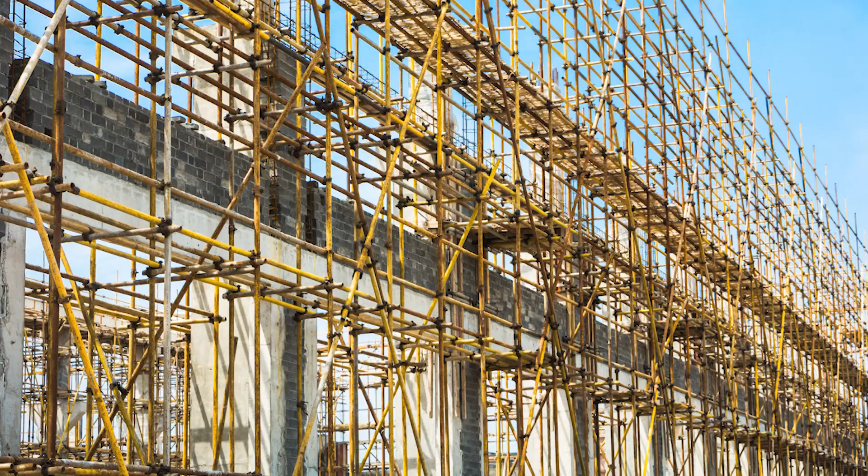Learners, I am Professor Munish Kumar Bharadwaj, and today I'll discuss with you risk assessment for scaffolding.

The content of today's discussion is: first I'll discuss with you the importance of risk assessment, then terminology related to risk assessment, then the process of risk assessment, and finally hazard identification.

The learning outcomes of this lecture are that after going through this lecture, you should be able to express the importance of risk assessment. Also, you should be able to define various terms related to risk assessment. Then you should be able to explain the process of risk assessment. And finally, you should also be able to explain the hazard identification process. Now let us begin the topic.

So, as far as risk assessment in scaffolding is concerned, risk assessment in scaffolding works is a crucial process that helps ensure the safety of workers and the successful completion of a construction project. Scaffolding is a common feature on construction sites and presents various risks including falls, structural failure, and environmental factors. Today, I shall discuss the important aspects related to risk assessment for scaffolding works.

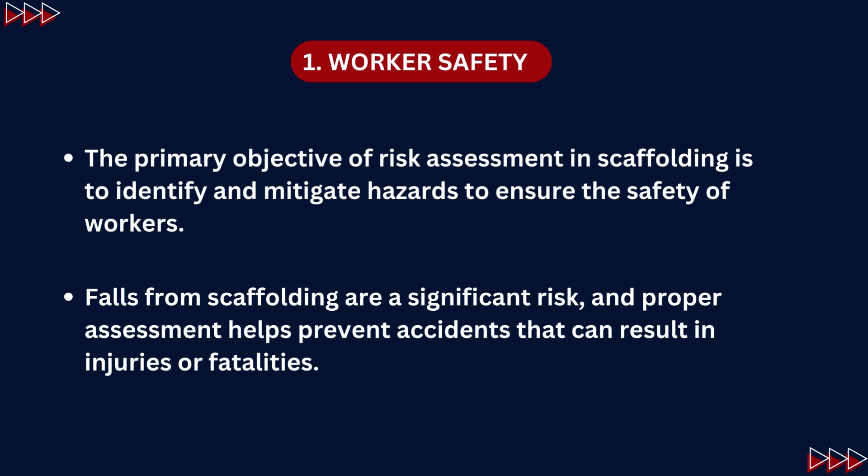So the first thing is worker safety. The primary objective of risk assessment in scaffolding is to identify and mitigate hazards to ensure the safety of workers. Falls from scaffolding are a significant risk, and proper assessment helps prevent accidents that can result in injuries or fatalities.

Then the second point is legal and regulatory compliance. Regulatory bodies and government agencies establish strict safety standards and regulations for scaffolding. Compliance with these regulations is mandatory, and risk assessment helps construction companies meet these legal requirements. So that is the importance of risk assessment.

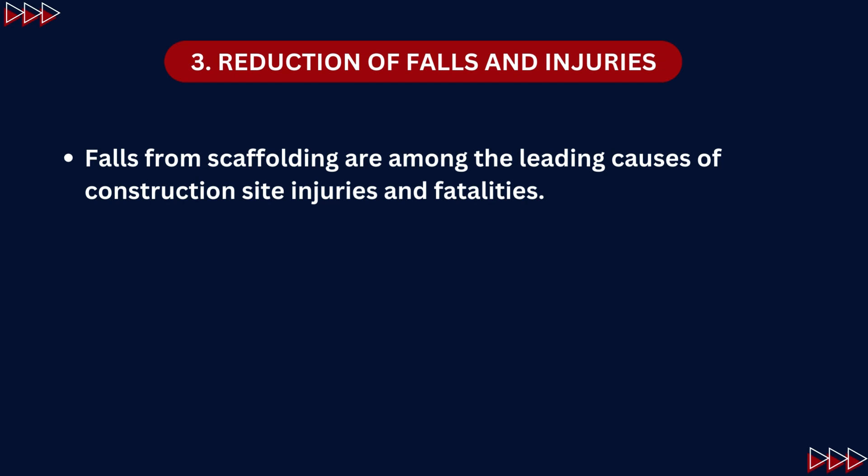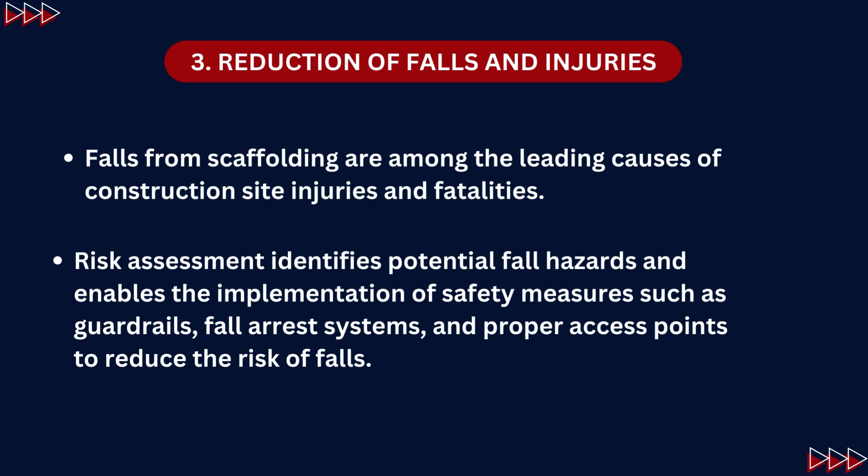Then the next point is reduction of falls and injuries. Falls from scaffolding are among the leading causes of construction site injuries and fatalities. Risk assessment identifies potential fall hazards and enables the implementation of safety measures such as guardrails, fall arrest systems, and proper access points to reduce the risk of falls.

Then the next point is minimizing liability. By conducting risk assessments and implementing safety measures, construction companies can reduce their liability in case of accidents. This can help protect the company from legal actions, fines, and financial losses.

The next is resource allocation. Risk assessments help allocate resources efficiently, because resources are precious. By identifying high risk areas and focusing resources on these areas, construction companies can optimize safety measures, training, and equipment use.

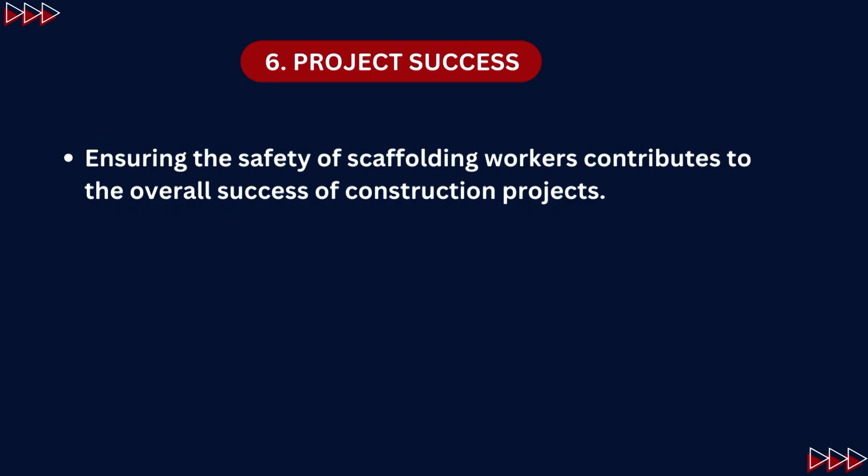The next important point is project success, meaning the success of the project. Ensuring the safety of scaffolding workers contributes to the overall success of the construction project, because when there is no fear, workers can work with more concentration, with more speed. Unforeseen accidents can cause project delays and cost overruns, both of which can be mitigated through effective risk assessment.

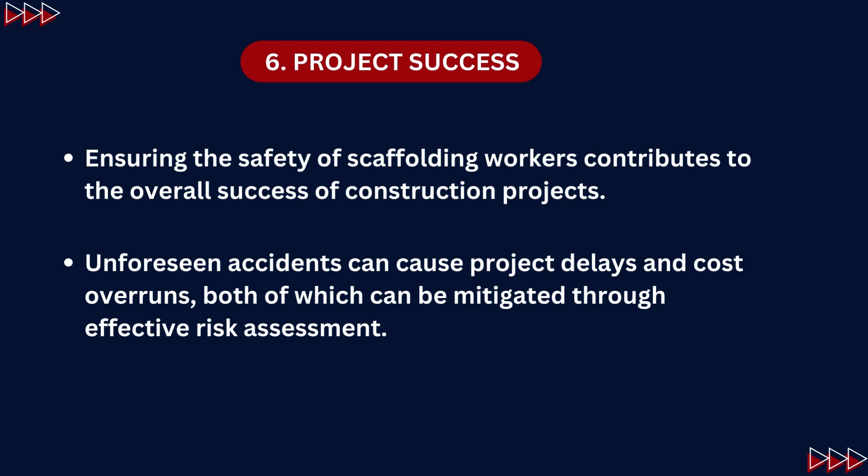The next point is improved productivity. Workers who feel safe and secure on scaffolding are more likely to be productive and efficient. Reducing the risk of accidents leads to a better work environment and improved morale.

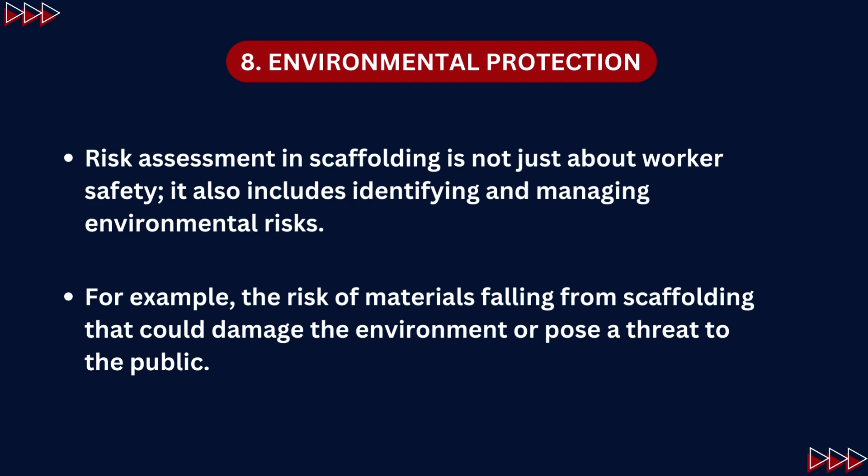Then the next point is environmental protection. Risk assessment in scaffolding is not just about workers' safety, it also includes identifying and managing environmental risks. For example, the risks of materials falling from scaffolding that could damage the environment or pose a threat to the public.

The next important point is reputation and brand image. Demonstrating a commitment to worker safety and responsible scaffolding practices can enhance a construction company's reputation and brand image. Clients, stakeholders, and the public are more likely to trust and support companies with strong safety records.

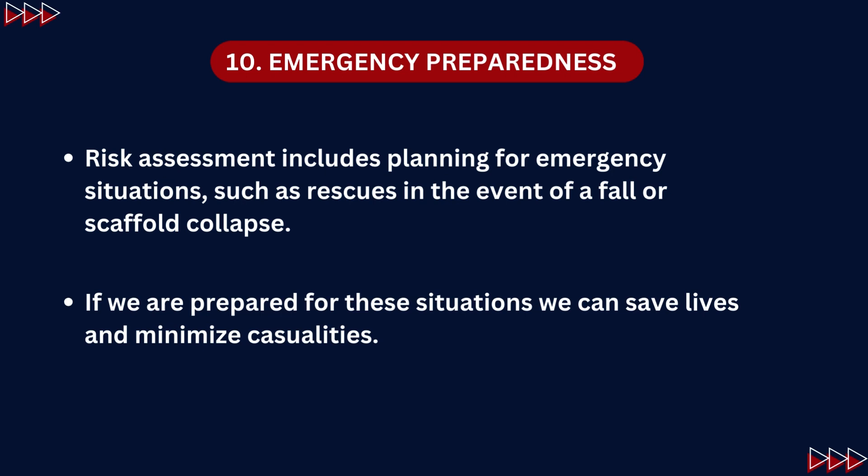Then the next point is emergency preparedness. Risk assessment includes planning for emergency situations such as rescue in the event of a fall or scaffold collapse. If we are prepared for these situations, we can save lives and minimize casualties.

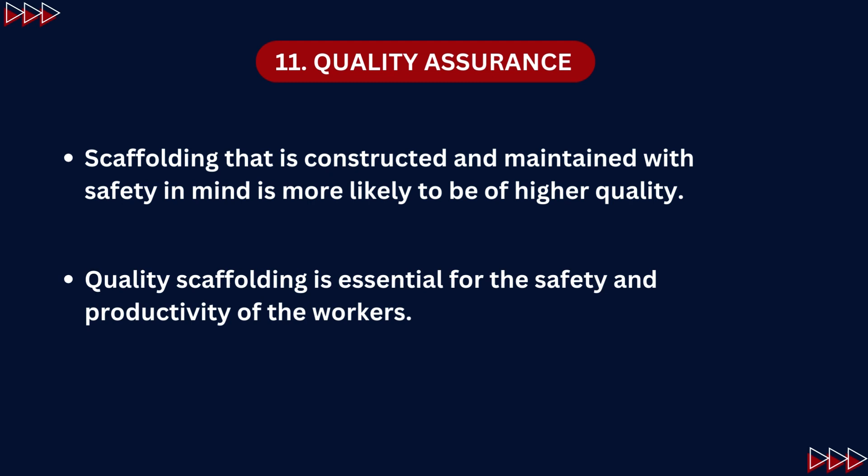The next point is quality assurance. Scaffolding that is constructed and maintained with safety in mind is more likely to be of higher quality. Quality scaffolding is essential for the safety and productivity of the workers.

So this way, we see that risk assessment in scaffolding is essential for safeguarding workers, ensuring legal compliance, minimizing accidents, and maintaining the overall success and reputation of construction projects. It is a proactive and systematic approach that contributes to a safer and more productive work environment.

Now, let us see some terminology related to risk assessment. The first important term here is hazard. What is a hazard? A hazard is defined as any condition, substance, or activity that has the potential to cause harm or injury to people, damage to property, or have a negative impact on the environment. So here we are covering three things: impact on people, property, and environment.

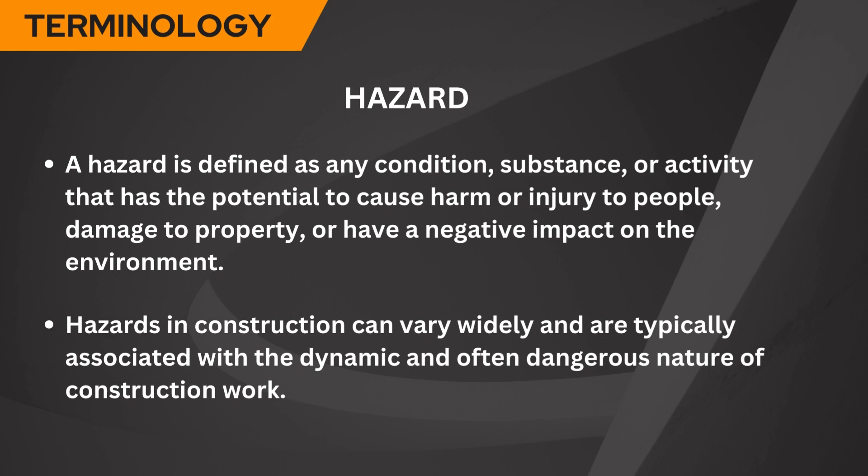Hazards in construction can vary widely and are typically associated with the dynamic and often dangerous nature of construction work. Let us see some examples of hazards in the construction industry. The first hazard in the construction industry is falls from heights. This includes falls from ladders, scaffolds, roofs, or elevated work platforms.

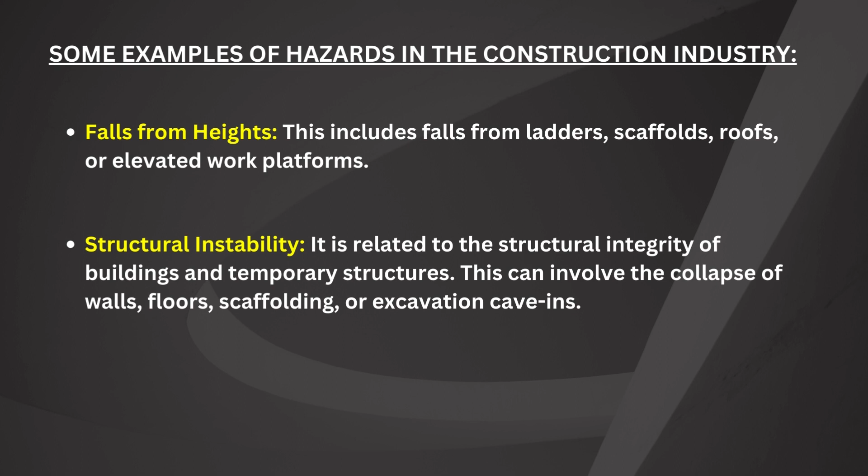Then next is structural instability. It is related to the structural integrity of buildings and temporary structures. This can involve collapse of walls, floors, scaffolding, or excavation cave-ins. The next hazard is electrical hazards: exposure to live electrical wires, poorly maintained electrical equipment, or unsafe wiring.

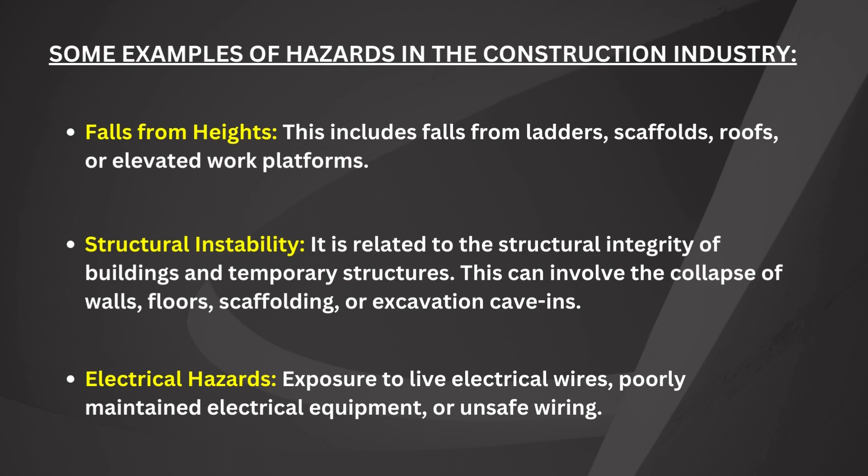Then another hazard is fire hazards. Construction sites often involve welding, cutting, and the use of flammable materials, and these all increase the risk of fire.

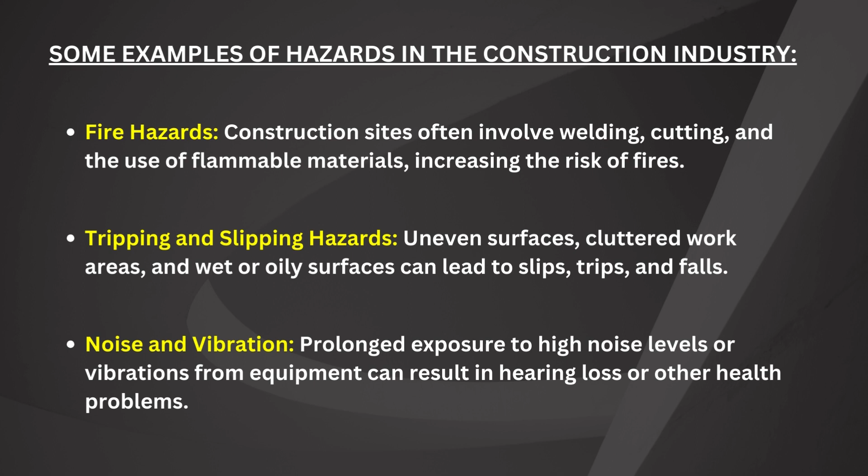The next hazard is tripping and slipping hazards. Uneven surfaces, cluttered work areas, and wet or oily surfaces can lead to slips, trips, and falls. Another hazard in the construction industry is noise and vibration. Prolonged exposure to high noise levels or vibrations from equipment can result in hearing loss or other health problems.

Now, let us move to another term, risk. What is risk? Risk is defined as the likelihood and potential consequences of events or situations that could result in harm, injury, damage, financial loss, or project delays. Risks in construction projects can vary widely and should be identified, assessed, and managed to ensure the safety of personnel and the successful completion of the project.

Now let us see some examples of risks in the construction industry. The first example is safety risk. In safety risk, first we cover fall risks: the risk of workers falling from heights such as scaffolding, ladders, or roofs. Another risk is structural risk: the potential for building structures to collapse or fail during construction.

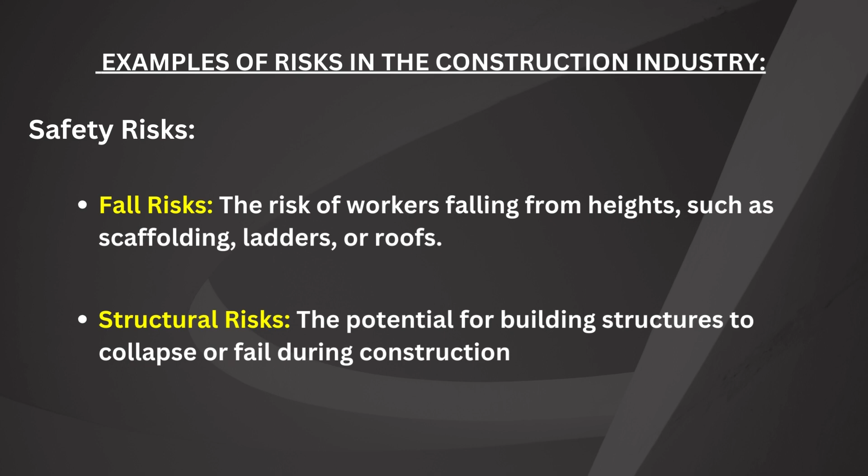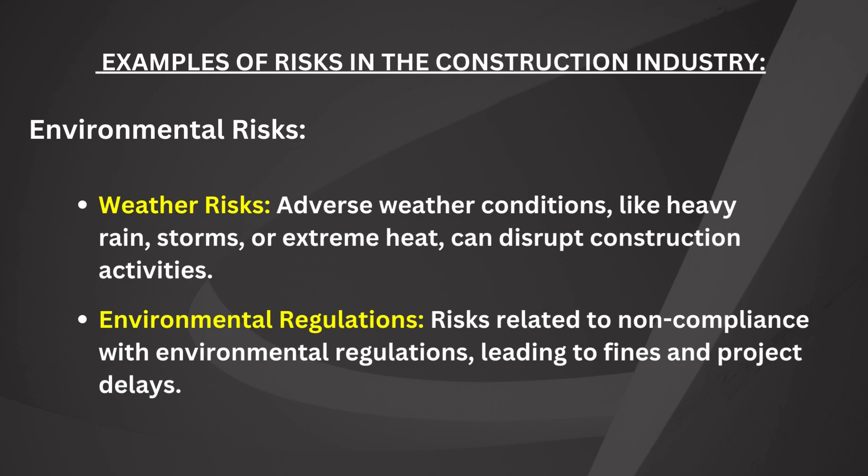Another type of risk is environmental risk. This again covers different types of risks. One is weather risk. Adverse weather conditions like heavy rain, storms, or extreme heat can disrupt construction activities. Another one is related to environmental regulations: risks related to non-compliance with environmental regulations leading to fines and project delays. Here, workers are not affected, but the project is affected when the company is fined, and ultimately it may cause project delay.

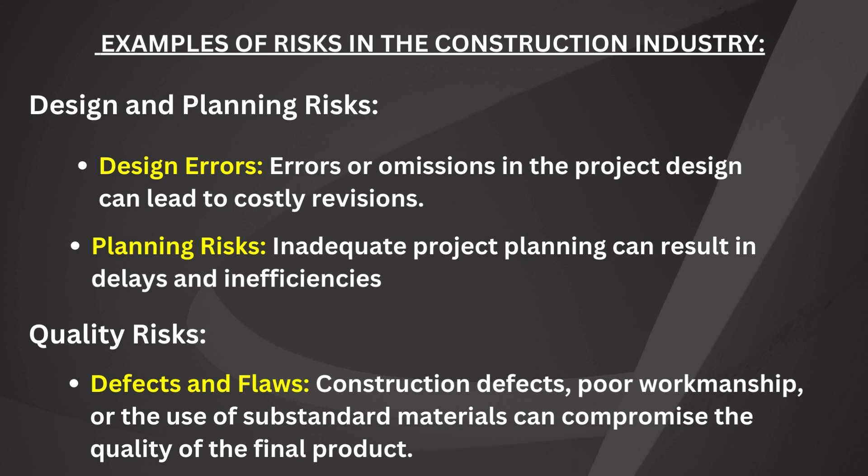Then another risk is design and planning risk. First is design errors. Errors or omissions in the project design can lead to costly revisions. Then planning risks. Inadequate project planning can result in delays and inefficiencies. Then another type of risk is quality risk. In this type of risk, we cover defects and flaws. Construction defects, poor workmanship, or the use of substandard materials can compromise the quality of the final product.

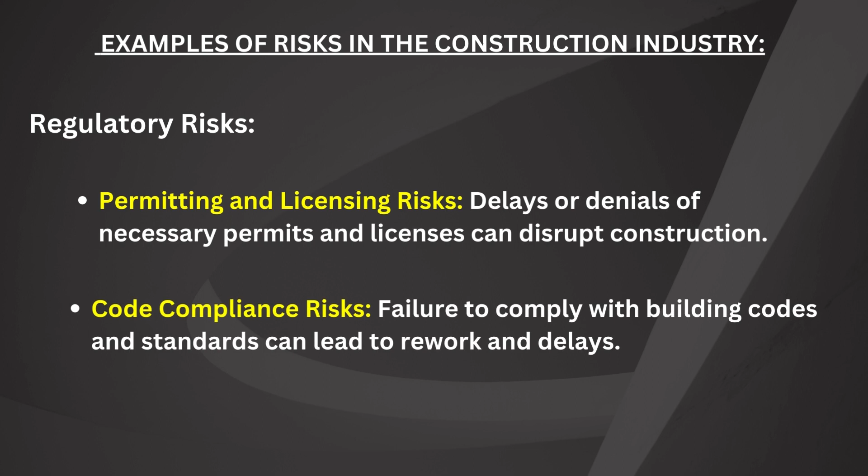Then regulatory risk. First is permitting and licensing risk. Delays or denials of necessary permits and licenses can disrupt construction. Another one is code compliance risk. Failure to comply with building codes and standards can lead to rework and delays. So these are different types of risks.

Now let us talk about the process of hazard identification and risk assessment. This process involves four steps. The first step is hazard identification. In this step, various hazards that could impact the project as well as the health and safety of the workers are identified and separated from those that cannot. Some may affect the workers' health as well as the project, and some may not, so we have to identify and separate these hazards. This requires a review of all hazards and their causes to determine whether they may be a threat to the project and the health and safety of the workers.

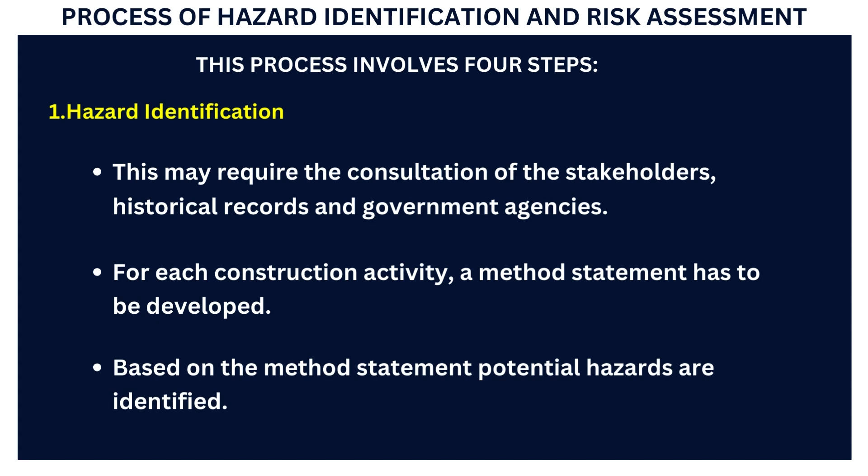This may require consultation of stakeholders, historical records, and government agencies. For each construction activity, a method statement has to be developed, and based on it, potential hazards are identified. Number two is risk assessment. After having identified the hazards, we calculate the risk per hazard. In this step, the level of risk for each hazard is examined. This may involve speaking with hazard experts, researching past occurrences and possible scenarios. The likelihood of the hazard occurring and its potential impact on people, property, the environment, business and finance, and critical infrastructure should be examined.

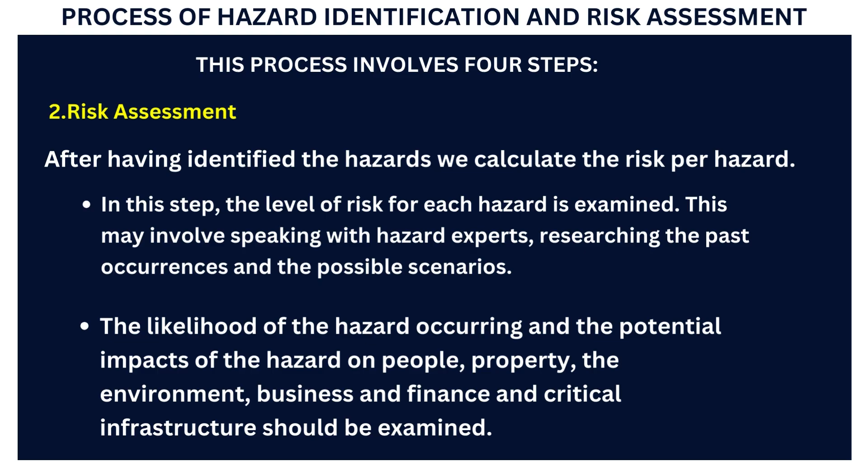The next step is risk analysis. The information collected in the risk assessment step will be analyzed in this step. The desired outcome of the risk analysis is the ranking of the hazards. This highlights the hazards that should be considered a current priority for your emergency management program. The next step is monitor and review. It is important to remember that hazard identification and risk assessment is an ongoing process, not a one-time activity. Hazards and their associated risks must be monitored and reviewed from time to time.

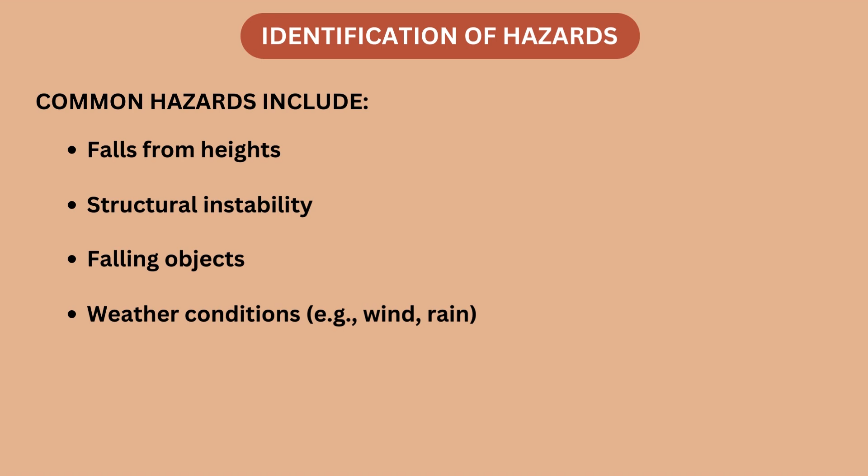Now, identification of hazards. How do we identify the hazards? Start by identifying all potential hazards related to scaffolding. Common hazards include falls from heights, structural instability, falling objects, weather conditions such as wind and rain, electrical hazards, and inadequate access or egress, meaning how the workers will access the scaffolding and move up.

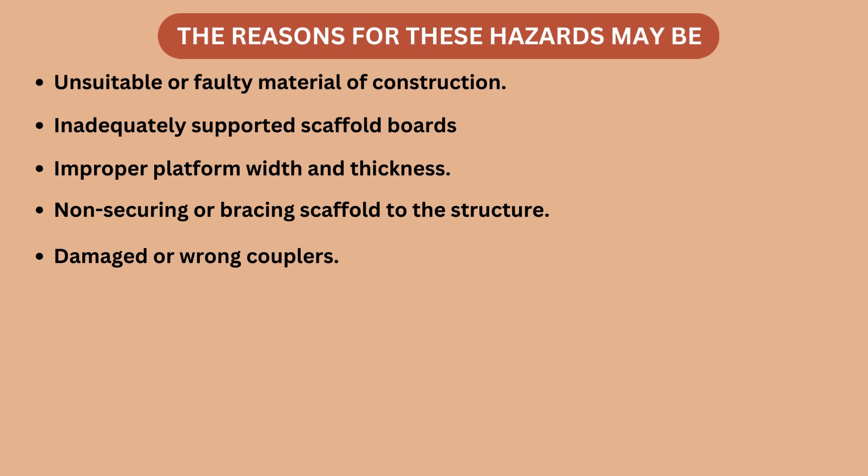The reasons for these hazards may be unsuitable or faulty construction material, inadequately supported scaffold boards, improper platform width and thickness, not securing or bracing the scaffold to the structure, damaged or wrong couplers used for connecting the scaffold components, unsecured ladders slipping, missing guardrails or toe boards, overloading the scaffolds, and erection on uneven ground. These are the reasons. Now let us see the methodology of hazard identification and risk assessment. It shall include steps and a time frame for identifying and assessing the hazards.

What is this? One must define the steps for the identification of hazards and a time frame for this identification. This means it cannot go unlimited; there has to be a time frame for that. The following information should be included.

What is that? First is, who will be responsible for identification, meaning who will identify the hazard. For example, it may be the workplace health and safety committee, or it may be an individual, or it may be individuals appointed by the committee. So these will be responsible for identification of the hazards.

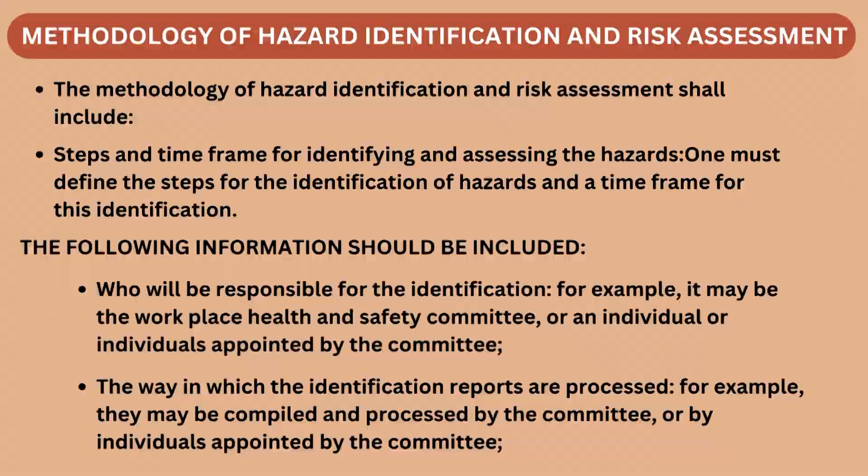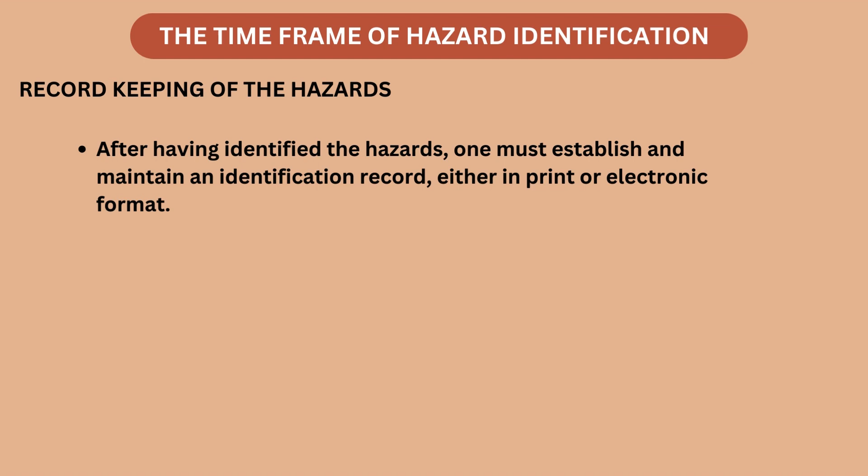Then the time frame of hazard identification, how much time this process will take, has to be decided. Then record keeping of the hazards. After having identified the hazards, one must establish and maintain an identification record either in print or in electronic format.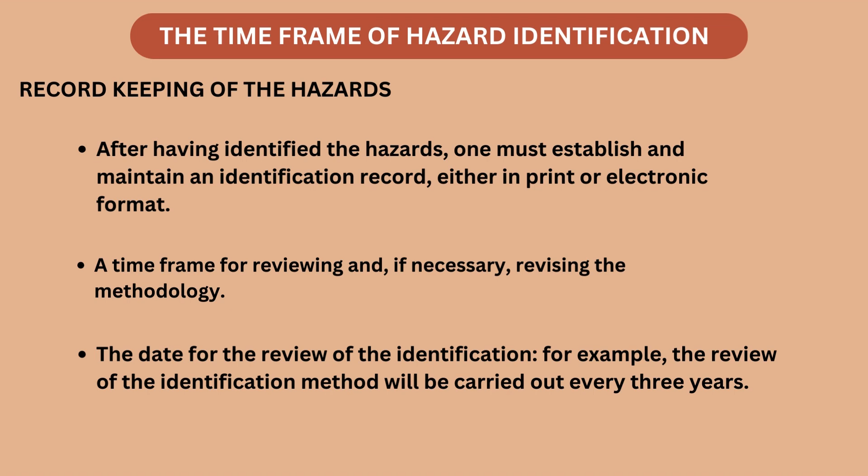Then a time frame for reviewing and, if necessary, revising the methodology, because we have to review the method from time to time, and if needed, it should be revised also. So the date for the review; for example, the review of the identification method will be carried out every 3 years. Then techniques for hazard identification.

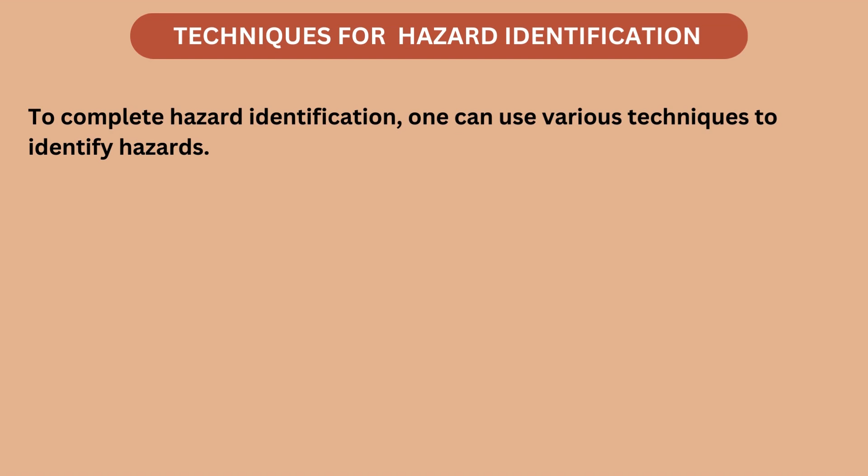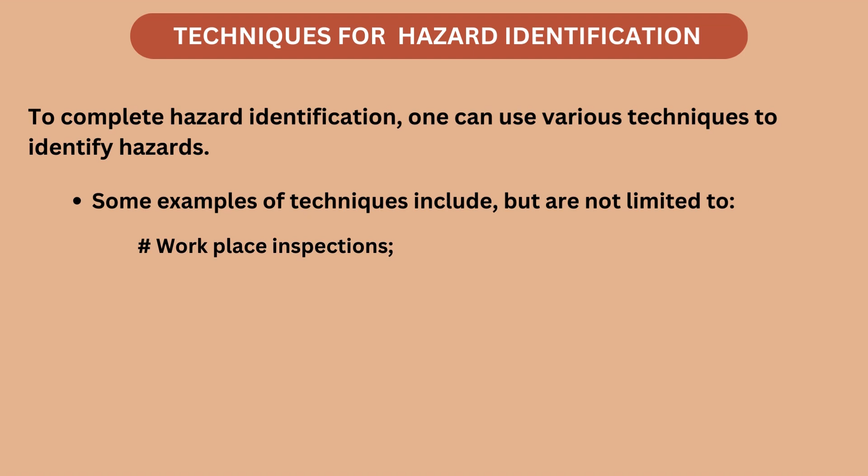To complete hazard identification, one can use various techniques to identify hazards. Some examples of techniques include, but are not limited to, the following. Whatever I am going to tell you, these are not the only techniques, but some examples. First is workplace inspections. Second is task safety analysis or job hazard analysis. Third is preliminary investigations. Fourth is potential accident factors.

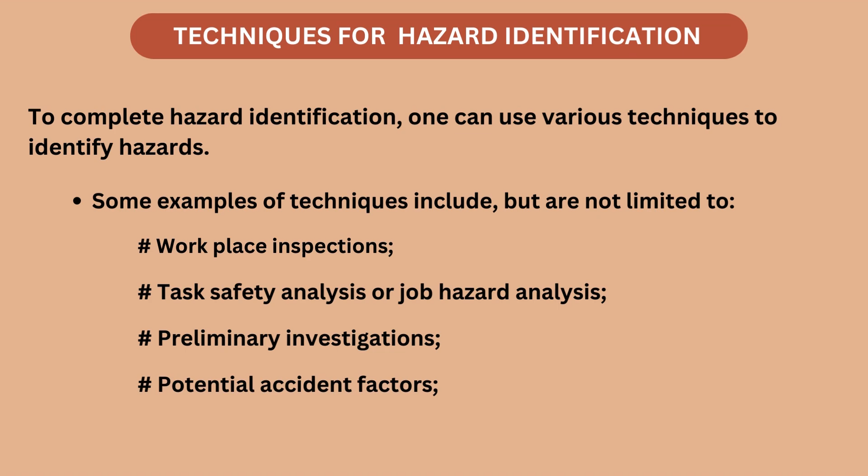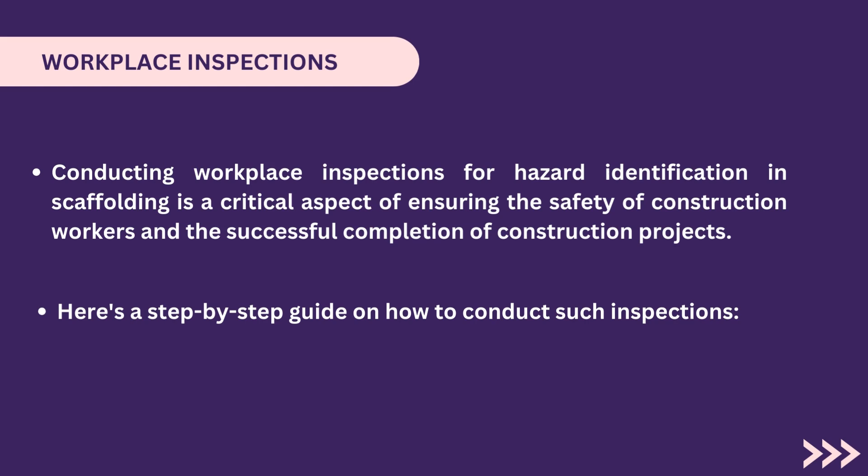So let us elaborate on workplace inspections. Conducting workplace inspections for hazard identification in scaffolding is a critical aspect of ensuring the safety of construction workers and the successful completion of construction projects. Here is a step-by-step guide on how to conduct such inspections. Number 1, prepare for the inspection.

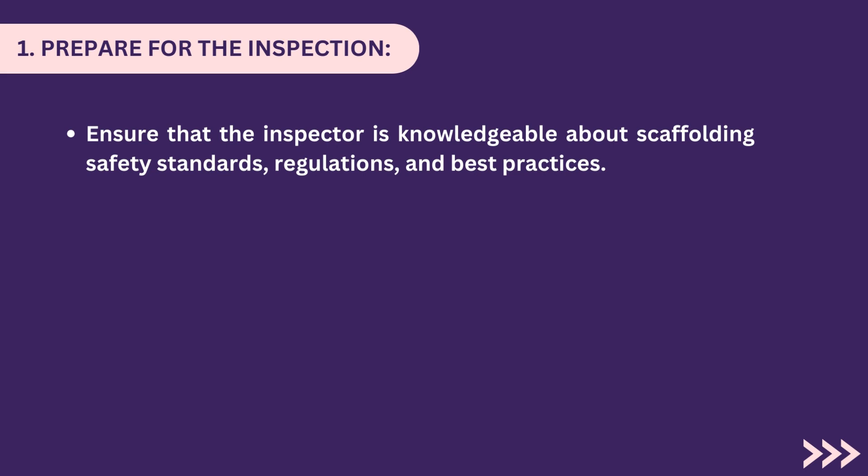What does it mean? Ensure that the inspector is knowledgeable about scaffolding safety standards, regulations, and best practices followed in scaffolding. Gather necessary tools and equipment, including an inspection checklist, personal protective equipment, a flashlight, and a camera for documentation.

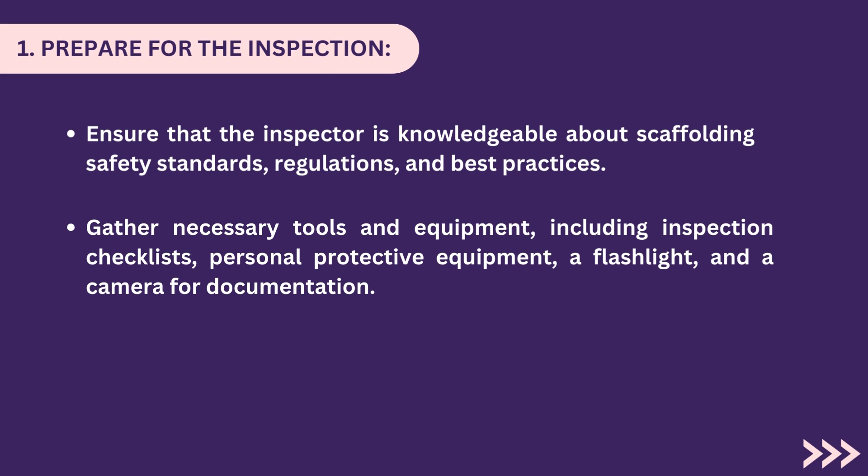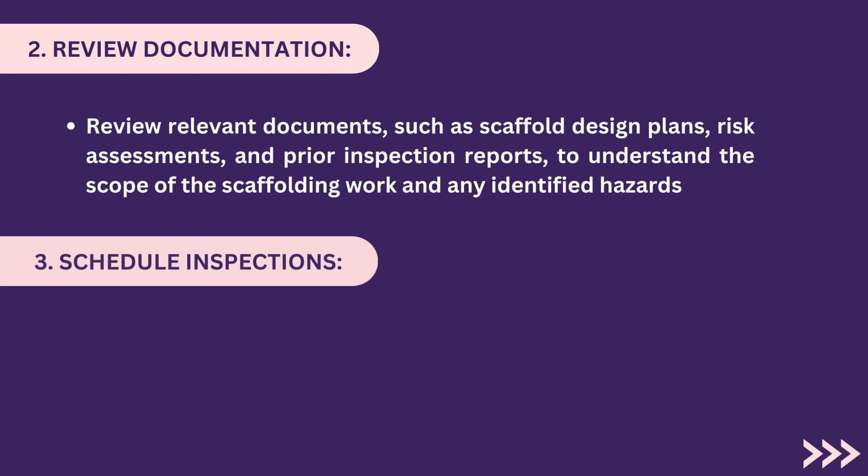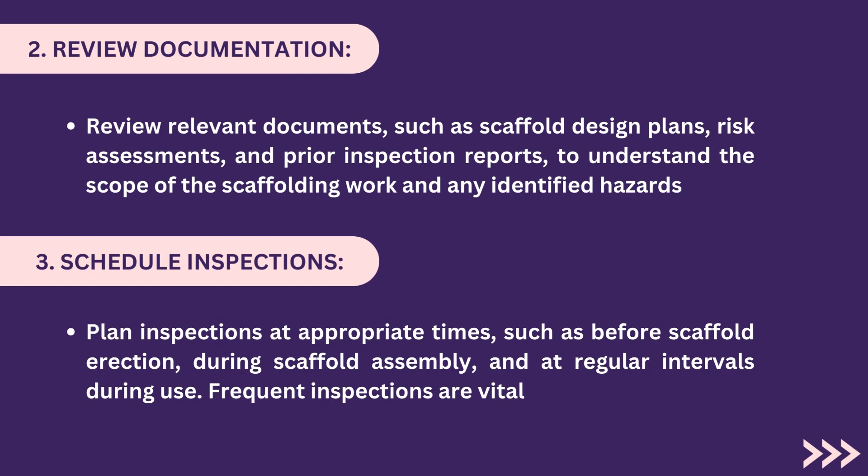The second point is review documentation. Review relevant documents such as scaffold design plans, risk assessments, and prior inspection reports to understand the scope of the scaffolding work and any identified hazards. Third is schedule inspection. Plan inspections at appropriate times, such as before scaffold erection, during scaffold assembly, and at regular intervals during use. Frequent inspections are vital because only this can help in reducing any failure, any risk.

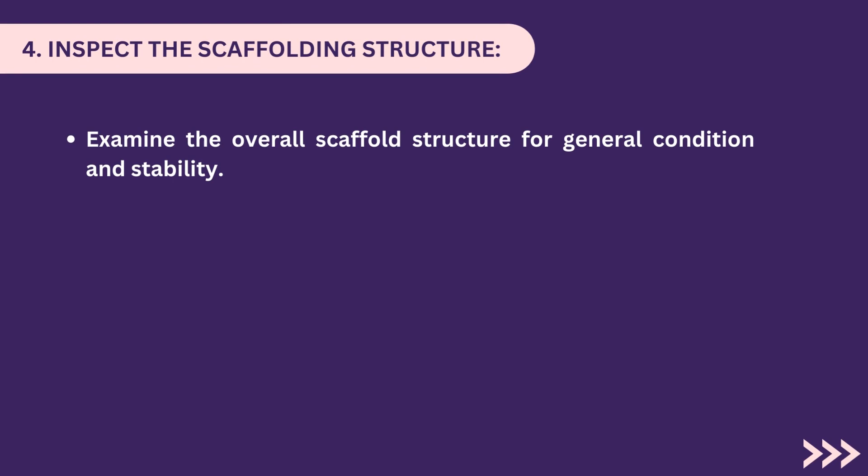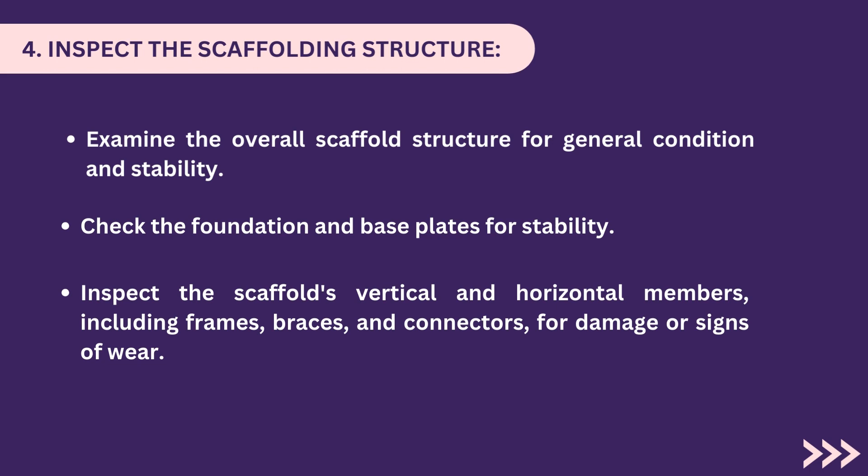The fourth point is inspect the scaffolding structure. Examine the overall scaffold structure for general condition and stability. Check the foundation and base plate for stability. Inspect the scaffold's vertical and horizontal members, including frames, braces, and connectors, for damage or signs of wear. The next point is assess the platform and decking. Inspect the scaffold platform boards and decking for integrity and proper installation. Ensure that there are guardrails, toe boards and mid rails in place.

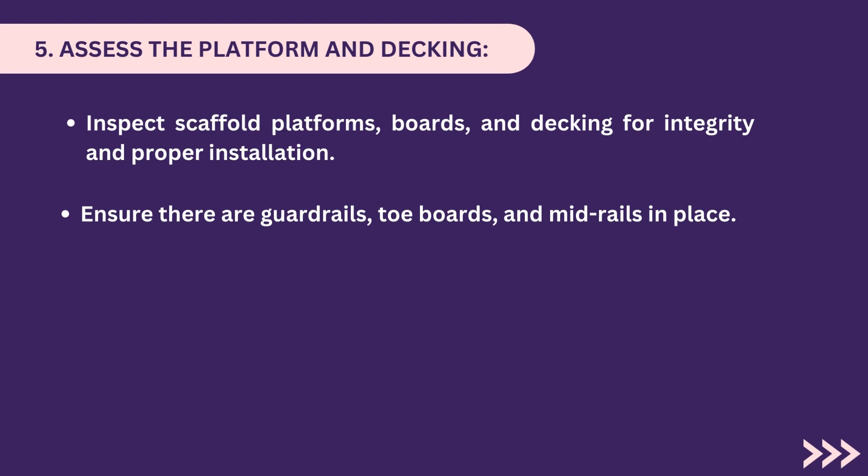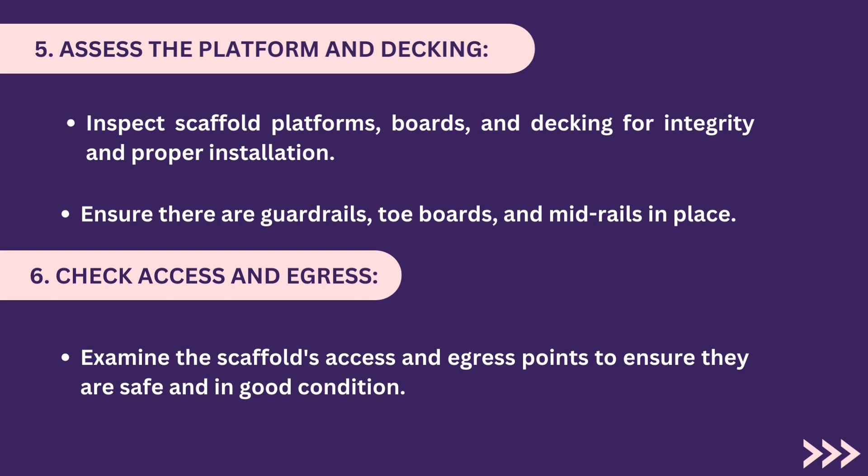Check access and egress. Examine the scaffold's access and egress points to ensure they are safe and in good condition. Then review load capacity. Verify that the scaffold's load capacity is not exceeded and that materials are distributed evenly. They should not be concentrated at a point. No large or heavy load concentrated at a point; rather it is distributed evenly throughout.

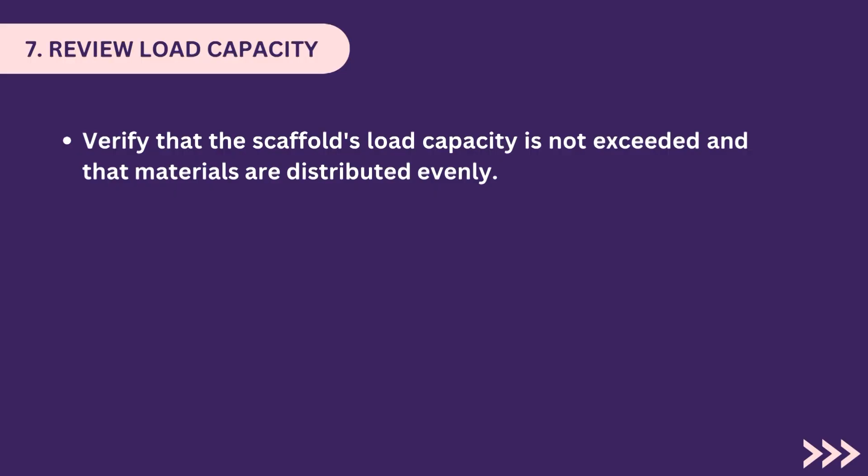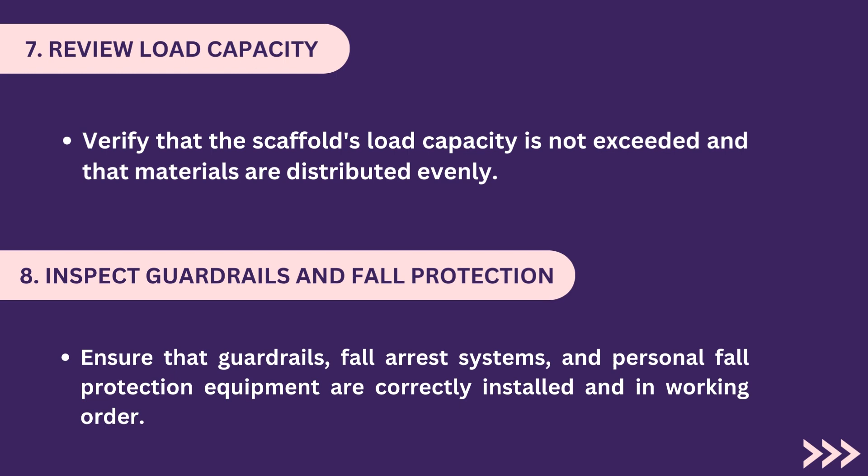The next point is inspect guardrails and fall protection. Ensure that guardrails, fall arrest systems and personal fall protection equipment are correctly installed and in working order. The next point is identify electrical hazards. Look for electrical hazards such as power lines in proximity to the scaffolding and ensure that proper precautions are taken. The next point is examine environmental conditions. Consider the impact of weather conditions such as wind, rain, and snow on scaffolding safety. Ensure the scaffold can withstand environmental forces and stresses.

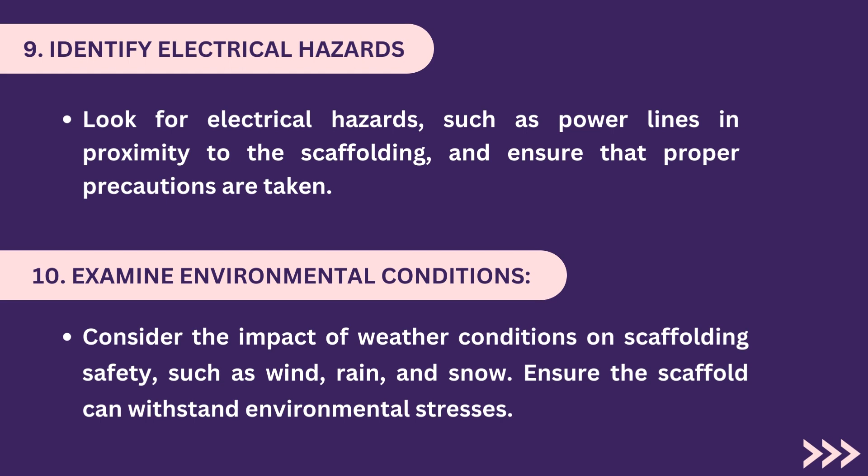The next point is document findings. Document all the findings, including photographs of any identified hazards or non-compliance issues. Use a standardized checklist to ensure a thorough inspection. The next point is address hazards and issues. If hazards are identified, take immediate corrective action. This may involve halting work until hazards are addressed.

The next point is communicate findings. Share the inspection results with relevant personnel, including workers and management. Provide clear instructions for addressing identified hazards. The next point is retain inspection records. Maintain records of all inspections, findings, and actions taken. These records are important for compliance and future reference. Then the next point is follow-up. Conduct follow-up inspections as necessary to ensure that identified hazards have been properly addressed and to verify ongoing safety.

Workplace inspections for hazard identification in scaffolding should be a routine part of construction site safety procedures. Regular and thorough inspections help prevent accidents, maintain worker safety, and ensure compliance with safety regulations and industry standards.